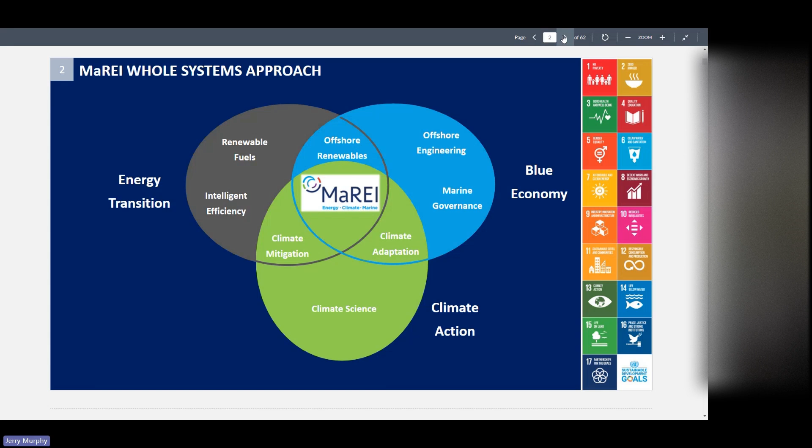So I'm the professor of civil engineering in UCC, and I'm the director of the MaREI Centre. And I work with these colleagues, so Archishman Bose, David Wall, Richard O'Shea, Davis Rusmanis, lots of brilliant young researchers have informed the content of this lecture. So we've lots of narratives and lots of stories, and I suppose my role here tonight is to knit it all together.

And this is the menu we work off. So we have this narrative that looks at renewable energy, that looks at anaerobic digestion, that looks at transport, that looks at agriculture, and we try to look at them all together in a system that utilizes energy and improves the environment. Last August, I spent a month locked away in a room working on this report for the International Energy Agency Technology Collaboration Program in Bioenergy. It looks at integration of anaerobic digestion with power to X.

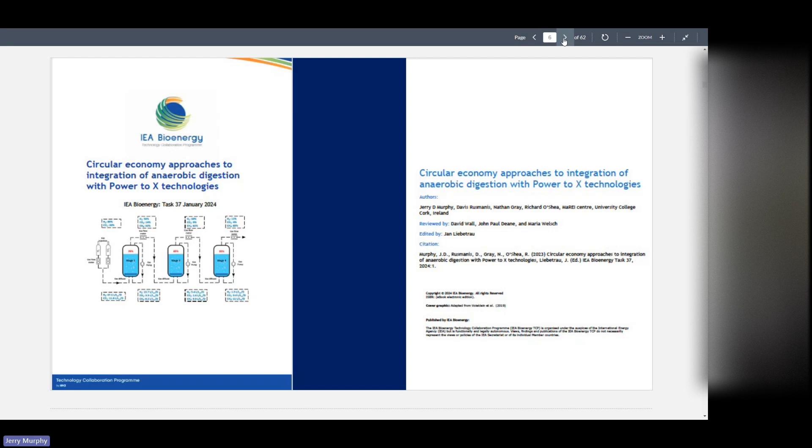So when we talk about power to X, we're talking about making things from electricity. And there's many things we can make, which I will talk about. So if I start on the top left and I look at renewable energy and electrolysers and look at it in an Irish context, the one thing we do find about energy and environment, every country is different.

It's bespoke. And Ireland is very challenged in that we're an island. So my electrical engineering colleagues often talk about islanded grids. We are one. We're not like Germany that's connected to France and connected to the Netherlands, or Denmark connected to Sweden and connected to Finland. We're very much an island. We have some interconnection, but it's quite sparse.

So in the National Ocean Test Facility in Ringaskiddy, we have 4 large swimming pools, and we can test devices that are at a scale of 1:20. So if we have a device that's 2 meters high, it could be 40 meters in the ocean. We can put down waves of 1 meter height, so they're 20 meters high.

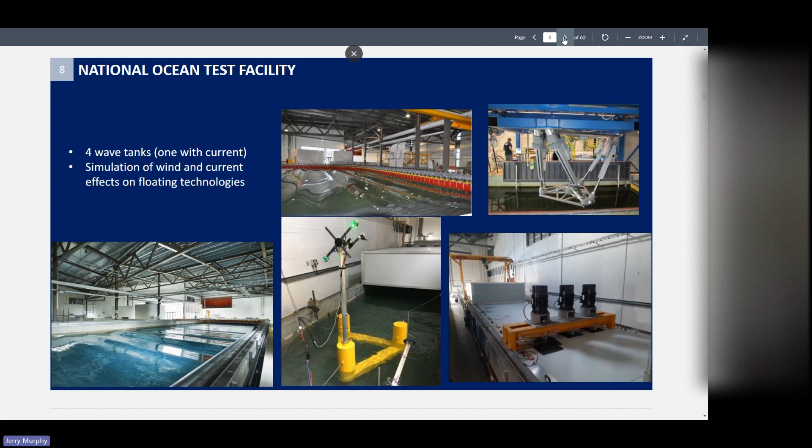And we coordinate a lot of the ocean test facilities across Europe. But it allows us to look at various technologies such as floating offshore wind, which is seen as a technology of the future in Ireland.

And this is what we're proposing to do in Ireland. We're already gone out to auction on the east coast for fixed bed offshore wind. We go to the east coast first because it's shallow water. Then we go down where we are here in Cork. The next phase will be down here, a mixture of fixed and floating.

And then we're going off into the open Atlantic. We're looking at going 65 kilometers offshore with floating offshore wind. Now, Ireland, because it's an island, has experienced the highest level of system non-synchronous penetration. And what that is, is the ratio of wind generation to the system demand. We've gone over 75%, and this is great credit to EirGrid, but this hasn't come easy.

For example, in Moneypoint, there's a flywheel that we spent 150 million euros to build to provide inertia, because if everything is coming from wind, it's not like the old turbines and the old power plants. So an awful lot of work has been done to allow us have lots of wind energy on the system.

And I suppose the challenge going forward is that we're only at 40% renewable electricity. What happens when it's 80 or 90% or 100%? It becomes very, very challenging. We have a target of 5 gigawatts of offshore wind by 2030, and that takes us to 80%. So we're doubling our percentage of renewable electricity by putting 5 gigawatts of turbines in the water.

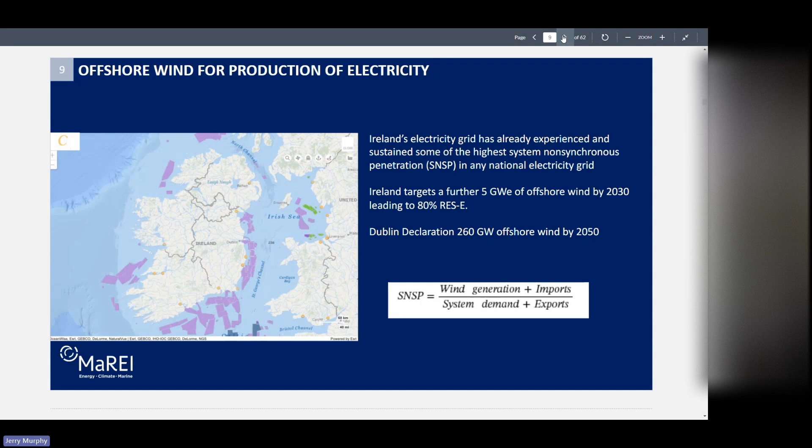And we talk about dispatch down. Again, this is very high in Ireland because we're an island. So all these wind turbines are blowing in the middle of the night in the summer, we're not using electricity. We spill, or we dispatch.

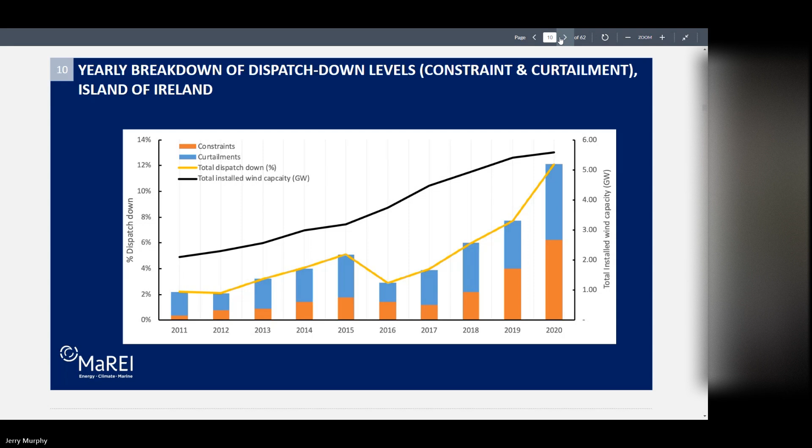This graph is from Davis Rusmanis in the audience. Ireland is at, in 2020, 6 gigawatts of onshore wind, and we are dispatching down about 12% over the year. That's either because there's a constraint on the electrical system, or it's produced at the wrong time.

So 12% of our electricity is very, very significant, and it's spilled. So there's an argument for hydrogen, and we will be producing lots of hydrogen. We make hydrogen by splitting the water molecule into hydrogen and oxygen.

Hydrogen will then be an energy vector. It's a gas, which is very important. We actually, in Europe and in America, use twice as much energy from the gas grid as the electricity grid. And gas is an ingredient, and that's important.

So when we talk about natural gas, it's CH4. When we talk about hydrogen, it's H2. And the H is important because we make fertilizer from ammonia, NH3. That comes from natural gas, and the N comes from nitrogen in the atmosphere in the Haber-Bosch process.

We make methanol for chemicals, and that's CH3OH. At the moment, we use natural gas. In the future, that will have to be a renewable molecule. So natural gas is an ingredient that we hope will be displaced by hydrogen, which will come from offshore wind.

So it's not just energy. There's chemicals, there's plastics, there's fertilizers, there's lots of things that use fossil fuel. And when we put fertilizer on the land, what we're really doing is putting natural gas on the land. So fertilizer comes from natural gas.

If we don't have natural gas, where does the fertilizer come from? And anyone from a farming background would be well aware that the cost of agriculture escalated massively during the ongoing war with Russia, because we didn't have natural gas coming across the border. We weren't making fertilizer to the same extent.

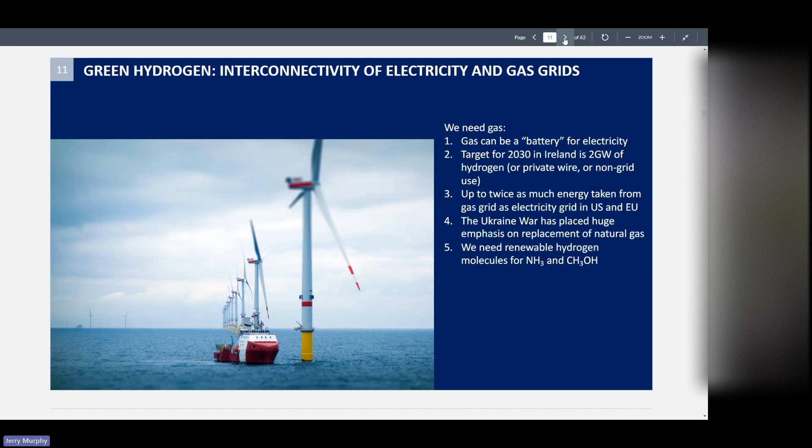When we talk about 15 megawatt offshore wind turbines, they're big. They're 345 meters tall. The Eiffel Tower is about 330. And we're going to put 7 gigawatts of offshore wind in the water. Originally, it was meant to be by 2030. That's 467 Eiffel Towers - Ireland is going to put 467 Eiffel Towers in the ocean.

Initially, it was meant to be by 2030. I'm a civil engineer, I'm thrilled because my graduates will be doing this. And we've been looking at ports, so we have to develop ports, which will be sort of almost like a radius of 500 meters.

The ship comes in, picks up a 300-meter tower, picks up a nacelle, picks up rotors, and then goes out into the ocean. And when we're looking at some of these devices will be floating, so it's going to be hydrodynamics, there's going to be cables, we're going to be tying them down to the bed of the ocean. So civil engineers are going to be in high demand working on these very, very difficult systems.

For example, in Foynes, in the west of Ireland, we're looking at wet storage. So there'll be huge frames sitting just inside the estuary, waiting for the 20 days when the waves aren't too high, and they'll all shoot out and try and erect these massive, massive structures.

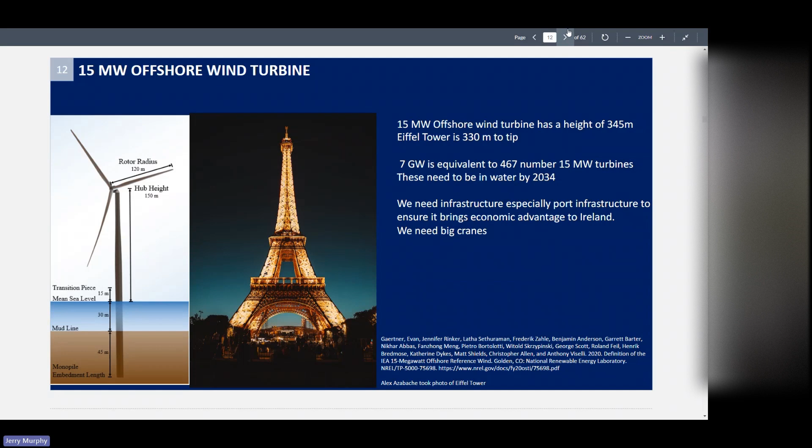This is the auction pipeline. And what's interesting here, we have an auction pipeline out to 2030, and it's 17 gigawatts. Ireland's electrical capacity hasn't gone beyond roughly 6 gigawatts. So we're putting in a capacity that's 3 times our present capacity demand.

And the idea is that we will do something with that power. A perspective we would have is we'll make hydrogen. And from the hydrogen, we can make ammonia, fertilizer, or methanol for green chemistry and formaldehyde. So Ireland will have lots and lots and lots of energy significantly in advance of the maximum demand for electricity.

Now, there will be periods of time where it gets very cold for 2 weeks and the wind isn't blowing, we will have problems. But typically, we'll have a lot more energy than is needed for electrification.

This is quite nice. This is the south coast, so we're all sitting here in Cork. And these two zones, this is Marine Area Plan. EirGrid is the designer of the system, and they're looking at having substations here.

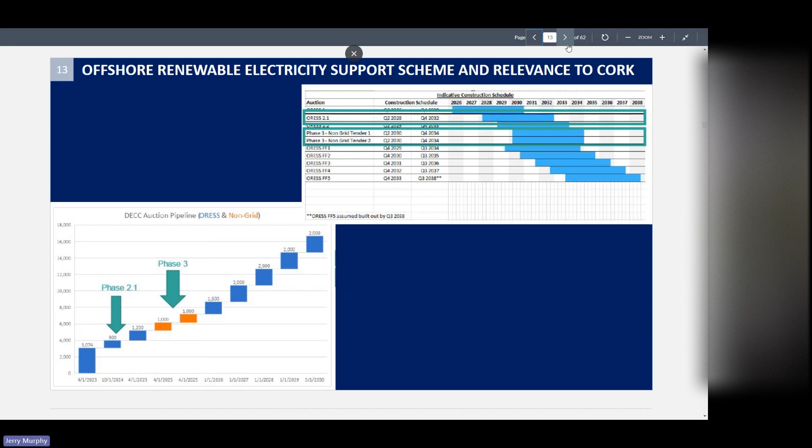But we're looking at a gigawatt coming ashore. And if I go back, so these little orange guys are non-grid. Initially, we were talking about hydrogen, but there are not enough electrolysers on planet Earth for Ireland to get two gigawatts of electrolyser by 2030. So we're looking at a gigawatt, potentially, of power coming into Cork.

And Cork City uses about 200, 250. So we're going to have a cable that does not go into the electrical infrastructure of Ireland that will have almost four times as much electricity as Cork needs. So that lends itself to, we can make hydrogen molecules and do things in Cork that will add value.

Now, you could also say we'll export it into Europe. And from my perspective as a civil engineer, you can make steel in Indonesia, assemble it in UAE, put it in the water off Ireland, and have a cable into Europe. And Europe continues to make cars and gas and hydrogen and ammonia, and we watch it. My preference is we bring it ashore and we do things with it and we make higher value, and we export things with higher value.

We had an ammonia production facility in the harbour in Cork. When we found natural gas, we made ammonia. Natural gas dried up, we stopped making ammonia, but the facility is still there. There's no reason we couldn't have green ammonia, where we use hydrogen from offshore wind instead of natural gas, but we make the same end product, ammonia.

And there is a proposal now for an ammonia combustion facility in the harbour. Mitsubishi have said that they're going to build an ammonia facility for combustion to make electricity. So when the wind isn't blowing for 20 days and it's really cold, we will have made ammonia, and that ammonia will make dispatchable electricity.

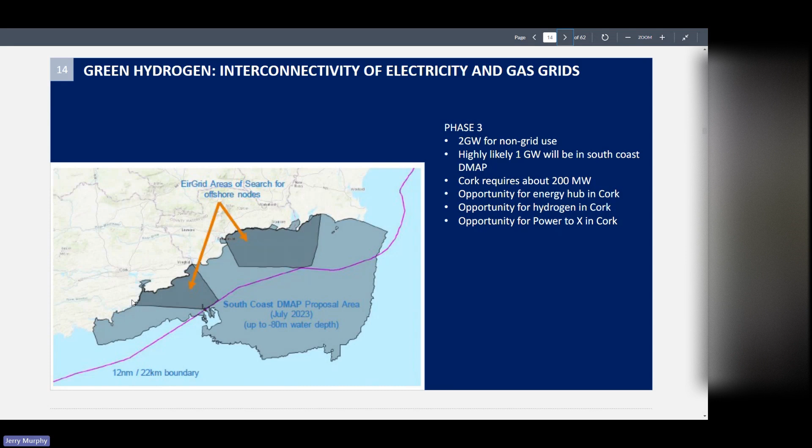We've looked at how this could work, and typically offshore wind farms will produce electricity when the demand is high. But in the middle of the night on a summer's day when nobody wants the electricity, the value will drop. The first auction in Ireland went out at about 8.5 cents a kilowatt hour for the electricity. So we're looking at bidding for electricity to make hydrogen at 4 cents a kilowatt hour in the day ahead market, and that would result in hydrogen at about 12 cents a kilowatt hour.

So it's important to realize that if you have electricity and you convert it to hydrogen, the price of the hydrogen is about three times the price of the electricity per kilowatt hour, because there are inefficiencies along the way and there's infrastructure required. So hydrogen is more expensive than electricity. And if you were to go back then and make electricity from that hydrogen — store the hydrogen and convert it back to electricity — you would be at about 22 cents a kilowatt hour. So you'd be almost five times more expensive than the electricity you came from. So the idea of hydrogen as a battery to make electricity later is very, very expensive.

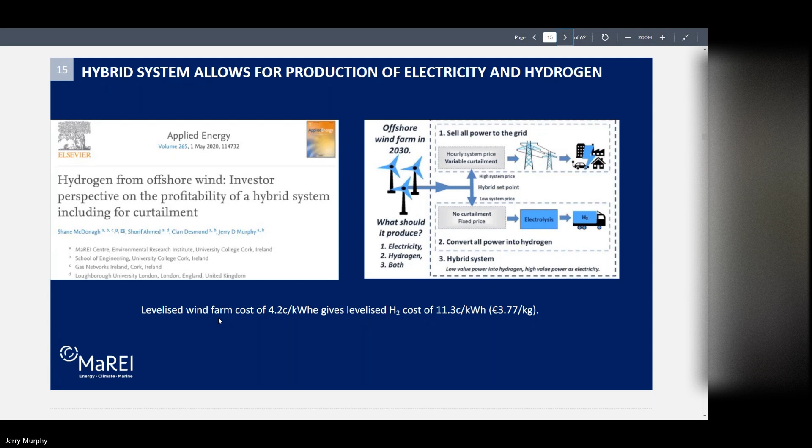We also looked at where we put these electrolysers. So you could have a HVDC cable coming ashore. For example, we have a HVDC cable coming from Brittany into Cork, which is under construction, it's going to cost about 2 billion. If we were to start that process now, we'd be waiting for 5 years because of supply chain issues, and it would be more expensive. So 2 billion to come from France to Ireland.

And we do see a lot of these wind farms in the future off the west coast being 65 kilometers from the shore. So there is a potential to put the electrolyser out on the wind turbine. So you now have your Eiffel Tower, you'd put it on a platform, you'd have a battery, you'd have a desalination unit, you'd have a brine discharge, and you'd have an electrolyser, and you can pipe the hydrogen ashore. So you can have a hydrogen pipe, which should not, we believe, take as long to order as a HVDC cable. You could also have, they like to have submersible, they like these spar turbines.

If you have a 1 gigawatt farm, you could have 100 wind turbines, and they could connect to a floating factory. And on that factory, you'd have your battery, your desalination unit, your electrolyser. And we're looking potentially that you could have the Haber-Bosch process out there. So you could have ships coming up to this floating platform and loading up with ammonia, and it doesn't come ashore to Ireland at all. So this is plausible. I suppose we don't know, but there are lots of concepts, but there'll be very big floating factories off Ireland making electricity or hydrogen, or maybe making ammonia.

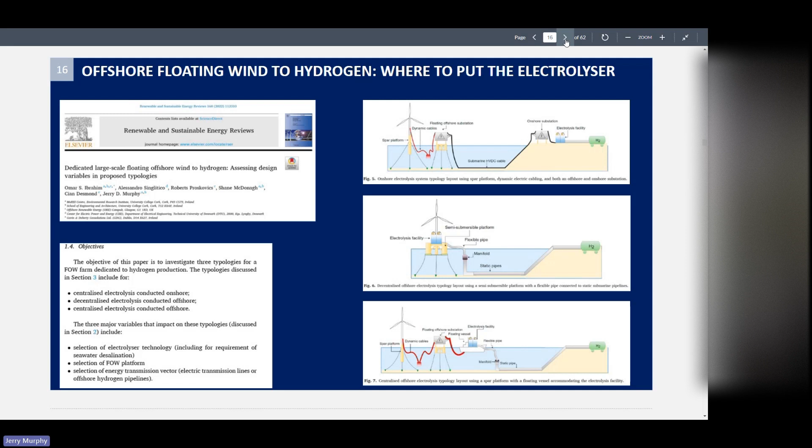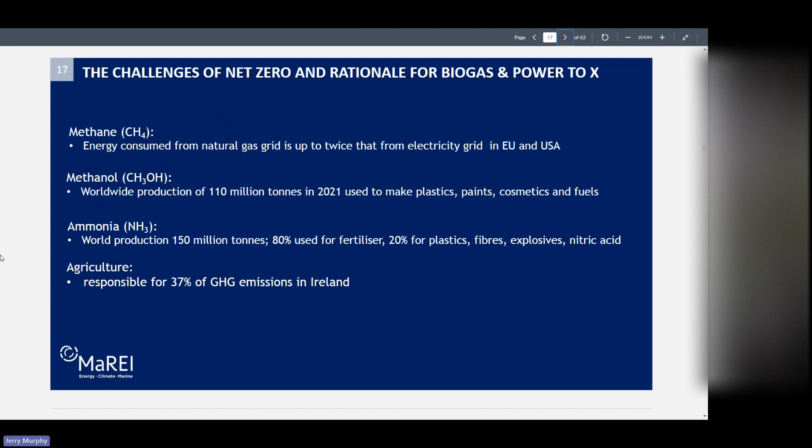Challenges for net zero: methane. We probably need methane because we use an awful lot of methane at the moment. We're going to need methanol. We produce 110 million tons per year, and methanol is a precursor to formaldehyde, which brings us to green chemistry — so we could have a green biopharmaceutical industry in Cork by making methanol. Ammonia, we mentioned this, it's a fertilizer, the most produced chemical on the planet. Again, the H2 can come from offshore wind. And then agriculture, responsible for 37% of our emissions in Ireland, predominantly from belching cattle but also from storage of slurry. So I want to move a little and look at anaerobic digestion and go into agriculture.

Anaerobic digestion is a microbial process. It employs some bugs and archaea. We start off with complex polymers. There's a hydrolytic process, then a fermentation process — you make volatile fatty acids such as acetic acid and butyric acid, and you can convert those acids to methane, water, and carbon dioxide.

There are lots of these across Germany and Sweden. They're very much a waste treatment process. I have colleagues who don't like the idea of anaerobic digestion because it's bio and everything should be electrified, but we have waste products — we have slurries, we have food waste. My understanding is our food waste goes on a boat and leaves our island. So we could treat our food waste.

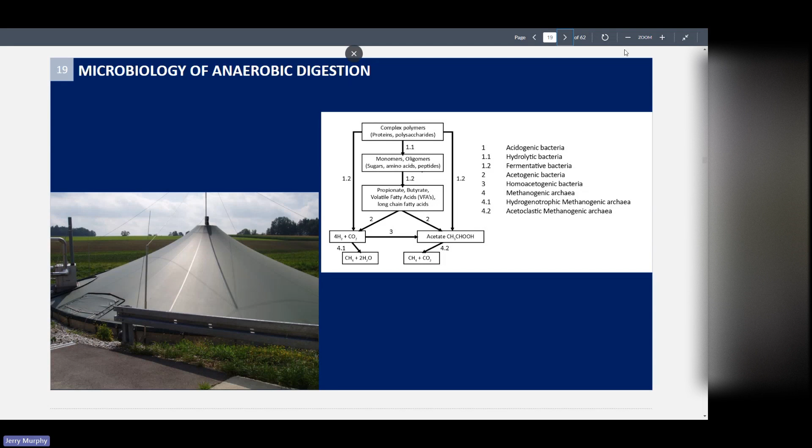We've done an analysis that if you treated the food waste from Cork in a digester, you'd run the bus service. If you treated the food waste in Dublin, you'd run the bus service. So we can have a circular economy proximity principle, converting wet organic material into an energy vector.

I led the IEA task on biogas for 6 years. We produced lots of reports, all available online — I've given 6 years of my life to this process. Lovely reports, lovely case stories, all available for free if you click on those links.

But what's happening now, which I find quite interesting — RePowerEU is Europe's way of looking at decarbonising, and they want a tenfold increase in biomethane by 2030. The Climate Action Plan for Ireland wants us to have 5.7 terawatt hours of biomethane, which is 220 3 megawatt facilities. So we're going to be building really large anaerobic digesters to allow us to meet our renewable targets and to decarbonise.

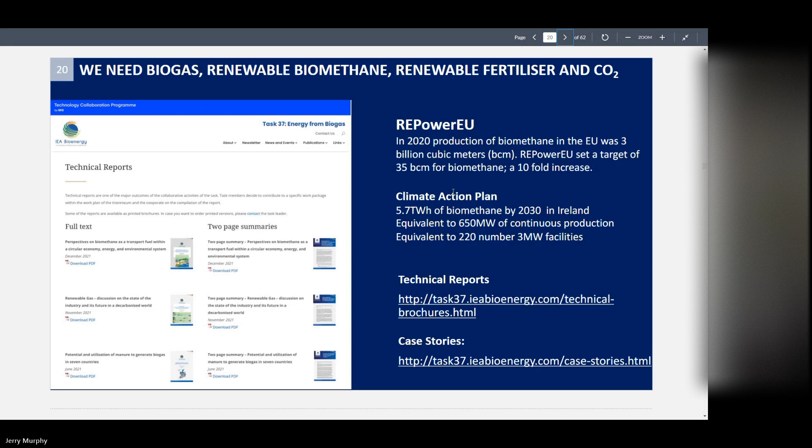There's no fertilizer. But what they did is put their dung into a digester to mineralize it, turning it into liquid with a nutrient value. So the only fertilizer on this farm is digestate from a biogas plant — the biogas is almost secondary. They needed an organic fertilizer, so they created one, and they're certified at minus 0.82 kilograms CO2 per litre of milk. So it's an organic farm producing organic milk — no fertilizers, no weed killers, no natural gas spread on the land as ammonia.

And this is the target for Europe and for Ireland that really can only be met by having small anaerobic digesters at these farms.

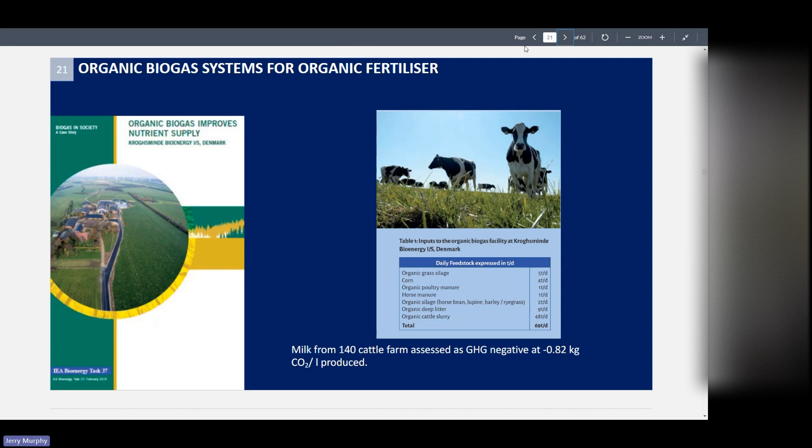This is the opposite case. Denmark got together around 2010 — farmers had a co-op convention — and there was a lot of eutrophication, lots of pollution of watercourses. A decision was made that by 2030, slurry won't go onto the land raw; it will be treated in advance. By 2020, over 50% of slurries were digested. My understanding is there were grant aids for 6-month storage. So it was driven by water quality.

We're aware that Lough Neagh in Ireland is highly polluted with a crust of microalgae from excessive nutrients, and Ireland has the 3rd highest level of bovinity on the planet — that's the ratio of cattle to people. We've lots of cattle and lots of slurry, and lots of our wells are contaminated. This is a solution: you have 6-month storage of slurries and you co-op together.

What happens here is there's 725,000 tons of wet organic material in a digester at the center of this circle. Farmers go to a sump, drop in their slurry, it's augered up to 20 kilometers to the digester, biofertilizer is augered back — which has a high fertilizer value and saves on buying fossil fertilizer — and they put the gas into the gas grid.

And this is a model — very, very large digesters. You could have an anchor tenant, which could be food waste in Cork or stillage from a distillery. Denmark is now at 39% of its natural gas coming from biomethane from these systems, but it was driven by water quality.

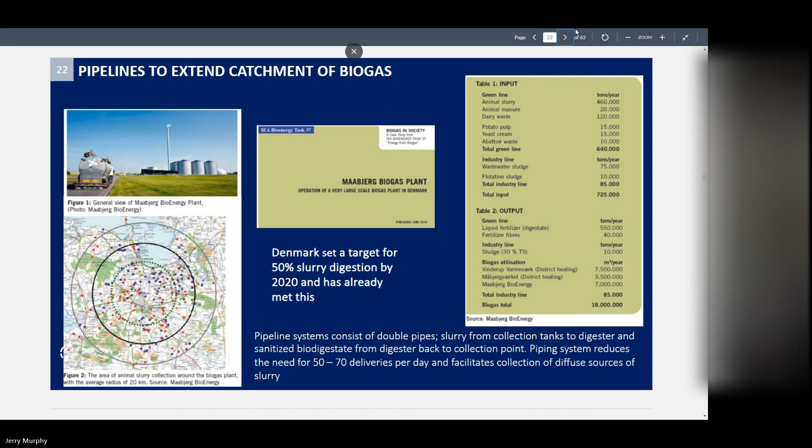Another thing that's quite interesting is CO2. CO2 is a product. Denmark uses 65,000 tons of CO2 per annum, and it goes into your bubbly water, into your beer. It's used - you can't slaughter animals without CO2. You introduce animals to an environment with lots of CO2, they become dozy, and you can then slaughter them. This was an issue during Brexit.

A fertilizer plant closed down. We get our CO2 at the moment from the production of fertilizer. So we use natural gas, CH4, the H goes to ammonia, NH3, and the CO2 is given off. That CO2 is collected - so fossil CO2 is used as the CO2 product in most countries. So when Brexit happened, a fertilizer plant shut down, there wasn't CO2, they couldn't slaughter pigs. Pigs got too old to be slaughtered, and there was mayhem. My understanding is there was money paid to the fertilizer plant to reopen.

But this plant in Denmark produces on its own 25,000 tons of CO2. The methane goes into the gas grid, the CO2 is left behind. There's a 7-step process to make it food grade. CO2 is used in soft drinks, in dry ice, in cooling eggs, in laser cutting, in laboratories. It's a product - we need CO2. So we can get that CO2 from a biogas plant.

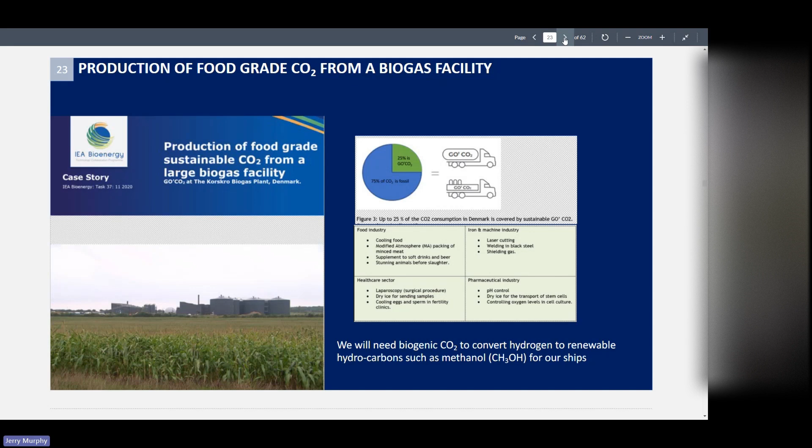So the joining together of offshore wind and hydrogen with anaerobic digestion is done in the next process, which I'll go through. This is a plant we visited in Germany - it's Werlte, in the north of Germany. Lots of offshore wind, lots of curtailment of electricity. So what they did is they built a 6-megawatt electrolyser next to an existing anaerobic digester.

It's a food waste digester, and the methane goes into the gas grid and the CO2 is left behind. So they made this electrolyser - electricity that would have been curtailed is spilled to the electrolyser. And we have the Sabatier equation, which is 4 moles of hydrogen from the offshore wind, 1 mole of CO2 from the biogas plant, gives you a mole of methane and water.

So here they have biomethane going into the gas grid, but they also have what they call e-methane. That methane comes from the hydrogen from offshore wind that would have been spilled and the CO2 that was a byproduct of the biomethane facility.

And they ran 1,000 Audi natural gas cars. So the business model was you buy your car, you pay a certain amount a month, and you have a little credit card that is your fuel, and that fuel is e-gas.

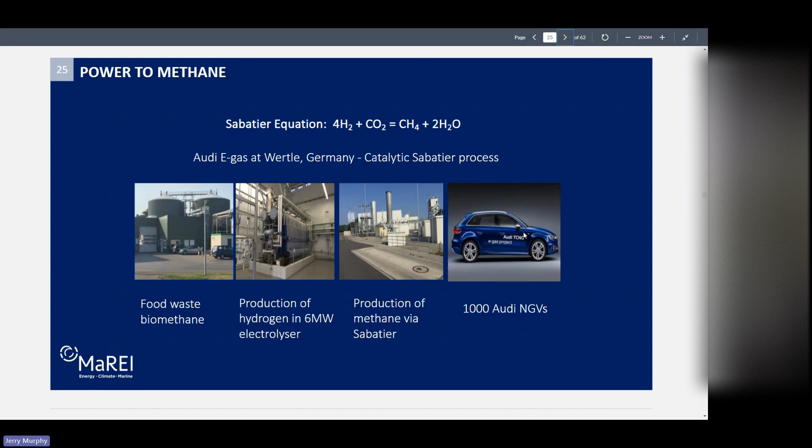So we found that very interesting, and we're biological engineers. So we came back, and this is the work we do. We do a lot of work here, but this guy is a hydrogenotrophic methanogenic archaea. What he does is the archaea eats hydrogen and CO2 and produces methane. It's exactly the same as the Sabatier equation.

The Sabatier process operates at 400 degrees Celsius - it's a chemical process. This is a biological process, and it's very favorable. When you look at the stoichiometry, it's a negative Gibbs free energy, which means it's favorable.

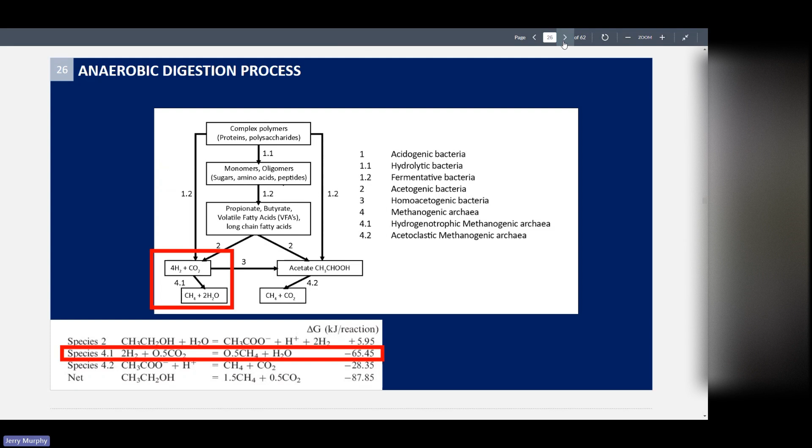So we went into our lab and we started adding hydrogen and carbon dioxide to our anaerobic broth. And we found that all of a sudden this became dominated by hydrogenotrophic methanogenic archaea by the name of Methanothermobacter wolfeii. Wolfeii is the Latin for tungsten - so giving them a little bit of tungsten, they worked a little bit better. We found a little archaea that ate hydrogen and CO2 and gave us over 90% methane.

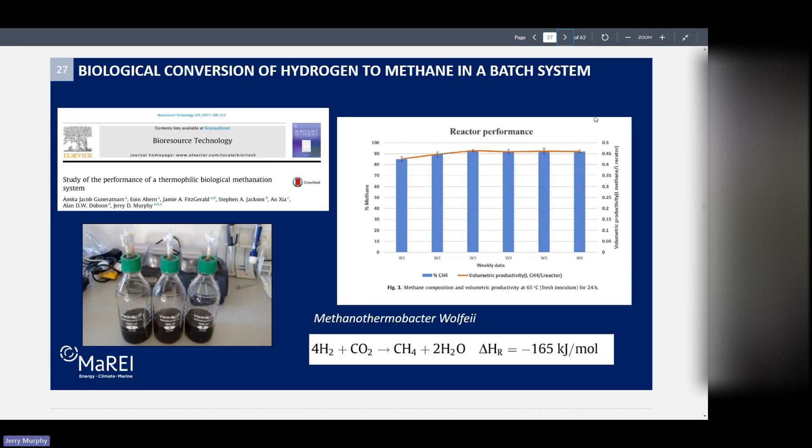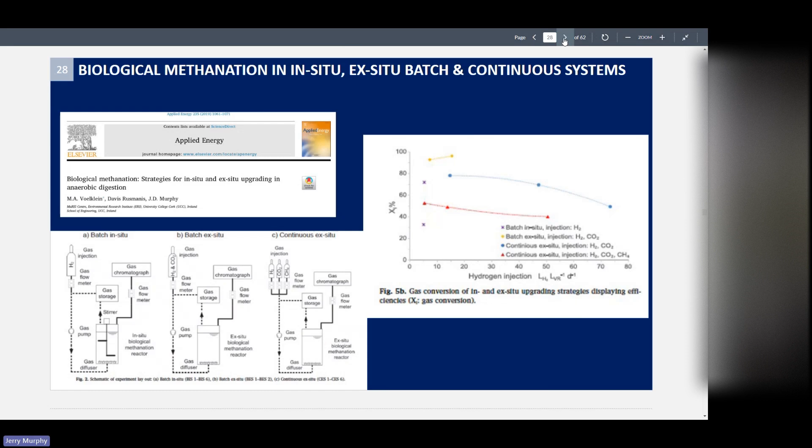So we then decided, well, we have to go further. And we did lots of science - this is Davis Rusmanis's PhD. We looked at feeding hydrogen into an anaerobic reactor, hydrogen and CO2. Hydrogen doesn't go into solution very readily - we needed it under pressure, we needed microbubbles. We played with lots of systems. So there's 3 years of work here by Davis Rusmanis, and we ended up with this type of a system.

So we decided what would work quite well is add hydrogen and carbon dioxide under pressure, circulate the gas a few times, do some of the job, go on to the second reactor, do a bit more, go on to the third reactor, and we have quite a good system.

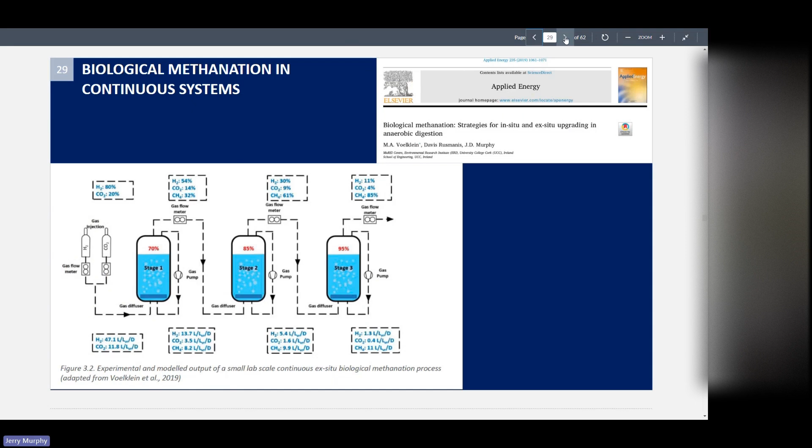So we have a nice technology, and we call that TRL level 6. So it needs a lot of work. You need to go into the field and do it.

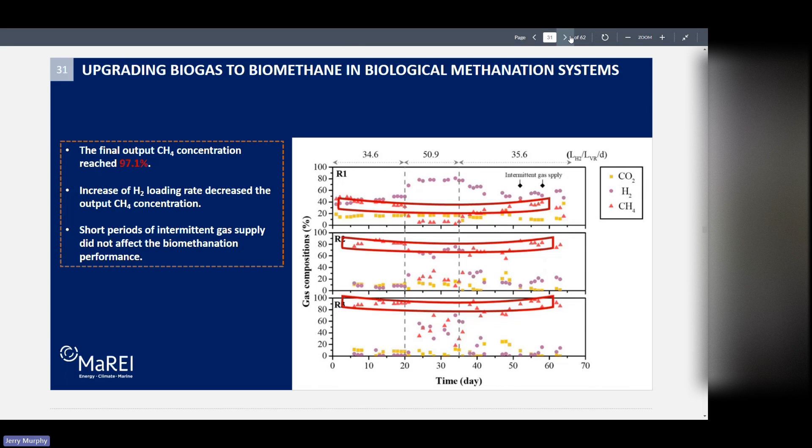So we were looking at how this would work, and we have colleagues in Germany who were also playing with this technology. Here is a little ex situ biomethanation plant and an electrolyzer. This is a demonstration plant, sort of research. Electrolysis is water being split into hydrogen and oxygen.

Hydrogen has a heating value of 3 kilowatt hours per meter cubed. They put in a 300 kilowatt electrolyzer. At 60% efficiency, there's 180 kilowatt hours of hydrogen per hour. Hydrogen is 3 kilowatt hours a meter cubed, so they're making 60 meters cubed of hydrogen per hour.

We need 4 times less that amount of CO2, so the biogas plant provides 14 meters cubed of CO2. 4H2 plus CO2 gives CH4. So the biogas, which was 16 meters cubed of methane and 14 meters cubed of carbon dioxide, is now 30 meters cubed of methane. We've converted all the CO2 to methane, upgraded the biogas to pure methane, and increased the energy output by 67%.

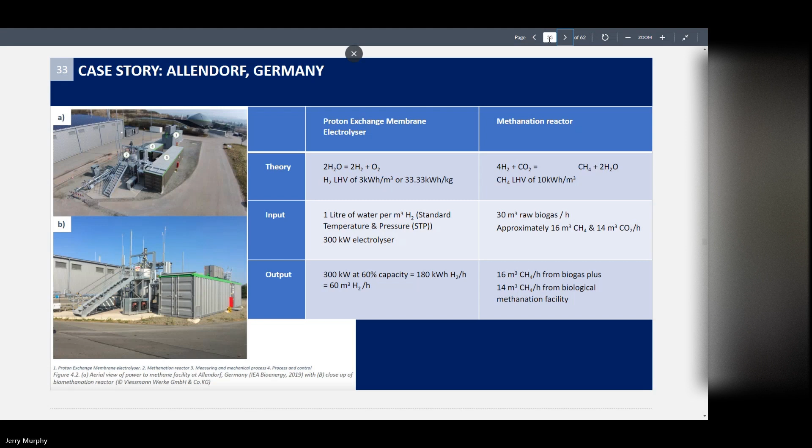There's another plant in Copenhagen, Biocat. It's a bit bigger - you have a 1 megawatt electrolyzer giving us 600 kilowatt hours of hydrogen. That's 200 meters cubed of hydrogen, which will react with the 50 meters cubed of CO2 to make methane. So our hydrogen converts CO2 to pure methane - the biogas becomes pure methane, and we've increased the yield by 67%.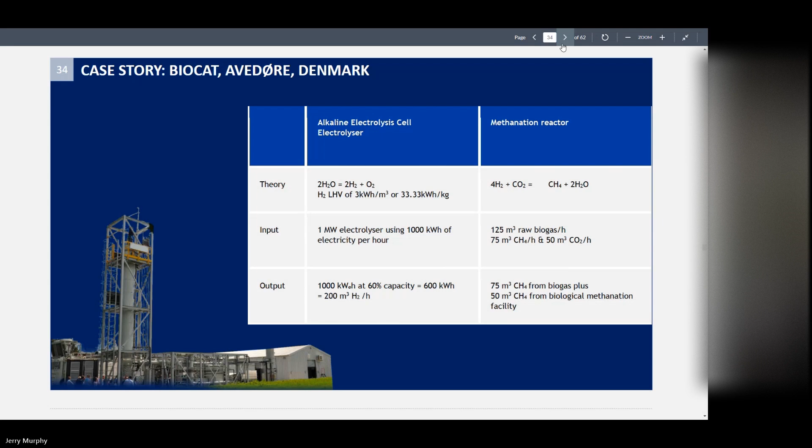So that's early technology. We're trying to look at power to X. When X equals 1, it's hydrogen. When X equals 2, it's methane. When X equals 3, it's methanol, so we go to a liquid fuel. There are all these X's. We've looked at hydrogen with an electrolyzer, and we've looked at methane with ex situ biomethanation. So we're trying to see where would we do this, and why would you do it.

This is a piece of work we did with Davis. The idea behind this was that we love to object to planning in Ireland - it's a pastime, we'll object to things. A digester was proposed in my community, and my neighbours were saying we'll wake up dead in our beds in the morning because we'll have asphyxiated. So we love to object.

So we looked at this in terms of, if you did an electrolyser in Cork, where would you put it? I designed Cork main drainage sewerage scheme in 1992, and I've never been there. People don't go to wastewater treatment plants. So instead, we'll stick the electrolyser in Cork main drainage down in Carrigrennan.

And we sized it based on the wastewater treatment plant. Typically you pump air into a wastewater treatment plant, and air is about 20% oxygen. So if you pump pure oxygen instead, you reduce the pumping by a factor of 5. We worked out the oxygen demand, and figured out what size of electrolyzer we'd require to supply that oxygen - it was a 10 megawatt electrolyzer.

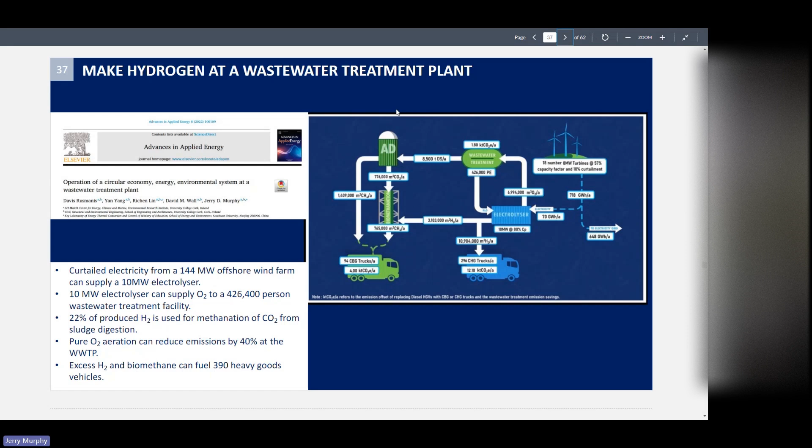We could put that methane directly into the gas grid. We could do lots of things, but we decided to look at the transport case. The other thing we were looking at is there's lots of anaerobic digesters in Germany and Denmark, and we're going to have more electricity than we need, so we can make hydrogen at those biogas plants.

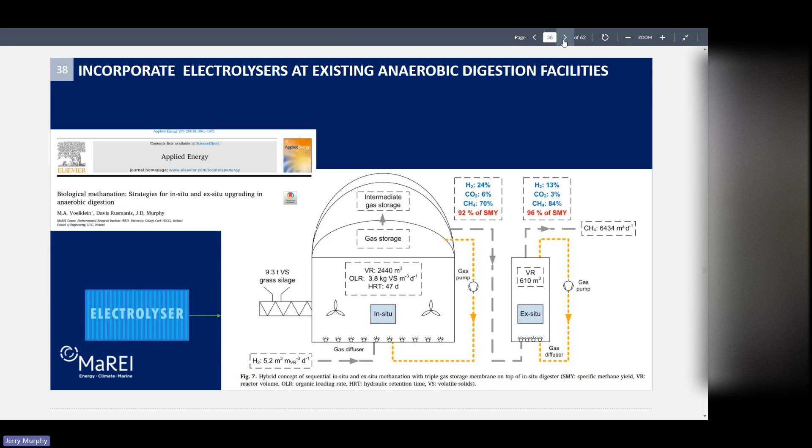So what we looked at, this is Denmark. They had lots of anaerobic digestion, big digesters dealing with slaughter waste. One thing I'd like to say is they don't use crops. Denmark does not have crops, because one of the criticisms of anaerobic digestion is that we'll use food to make gas. So Denmark decided that there's no crops. This is for food waste, for pig slurry, for slaughter waste.

At the moment, the level of biogas production is a 39% substitution of natural gas. But by putting an electrolyzer and an ex situ biomethanation at one of these digesters, you increase the output of methane by 67%, because all that CO2, which is about 40% of the biogas, becomes methane.

Ole Hvelplund is the CEO of Nature Energy. They've been bought out by Shell, but they're now building the world's largest ex situ biomethanation system. The plan is, if they do that at every digester, without using any more feedstock, you're at 65% green gas. So that's a plan. And they will have 100% green gas by 2035. So all the gas in the grid will be green. Some of it will be biogenic from slaughter waste and distilleries. Some of it will be e-methane.

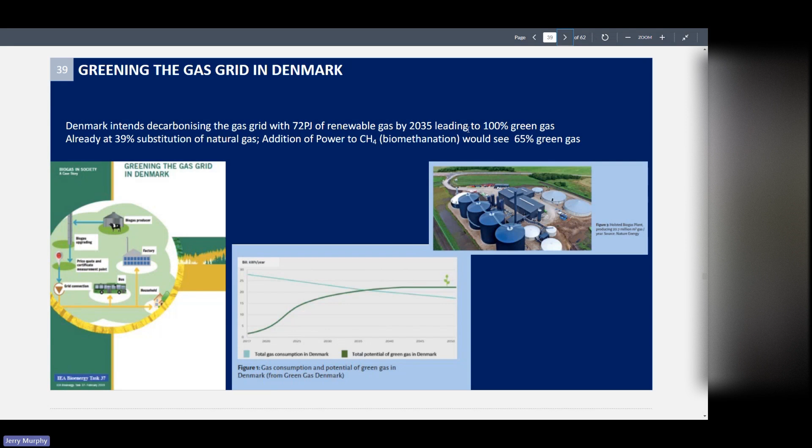Hydrogen is very, very voluminous. It's quite explosive. So converting it to methane condenses it, and you can use existing infrastructure. So the gas grid that's there can use methane to transport it. It can't use hydrogen.

We then looked at other technologies which are quite nice. So this is a typical anaerobic digester. This is power to gas, where we add hydrogen, but we also looked at just putting the electrodes directly into the anaerobic digester, because an electrolyzer is at best 70% efficiency. So we stuck electrodes into our digester. What happens is electrons go to the cathode. The electrons react with CO2, and they convert the CO2 to methane. So if you like, this is power to gas in one chamber with no electrolyzer.

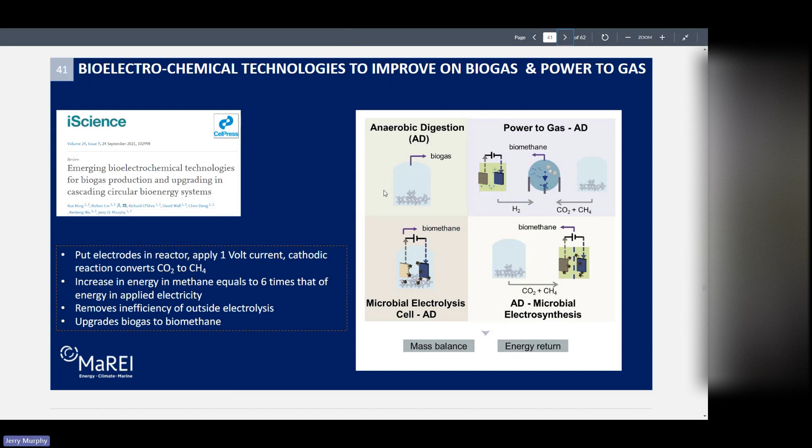We put in a voltage of 1 volt, and we found that we were getting 6 times return of methane compared to the electricity we put into the digester. So it's at a very low TRL, but this is a way of almost halving the feedstock to get the same amount of methane output. So we call that a bioelectric scheme.

One thing we're doing, which I'm really fond of, this is for small scale systems. So we're introducing algae. We've been working on this for a while, and it's the PhD of Archishman Bose, who's now a full-time lecturer in process engineering here in UCC, funded by Eli Lilly. The work we did was, is there a way of upgrading small-scale biogas?

So we're looking at Dingle, and we've done this work with Dingle Hub. We've been going down there since probably 2016. They had a problem set, and I love this. The problem set they had in Dingle was they would like to have a slow food movement. They'd like to say this is Dingle beef, grown in Dingle Peninsula, and it's salty because it's on a peninsula, and you'll pay €2 extra because it's Dingle beef. The problem is they don't have an abattoir, and the prices they were quoted for dealing with byproducts was very, very high. So if we build a digester in Dingle, they can have an abattoir, and the byproducts in the abattoir go into the digester.

They also spend $2 million a year on food waste going from Dingle restaurants to Waterford to be composted. So they save $2 million by having a digester because the food waste goes into that digester. They spend $1 million a year on diesel in Dingle for tractors, and they want us to make methane for their tractors. So what we're looking at is that the biogas goes up through a carbonate bicarbonate tower.

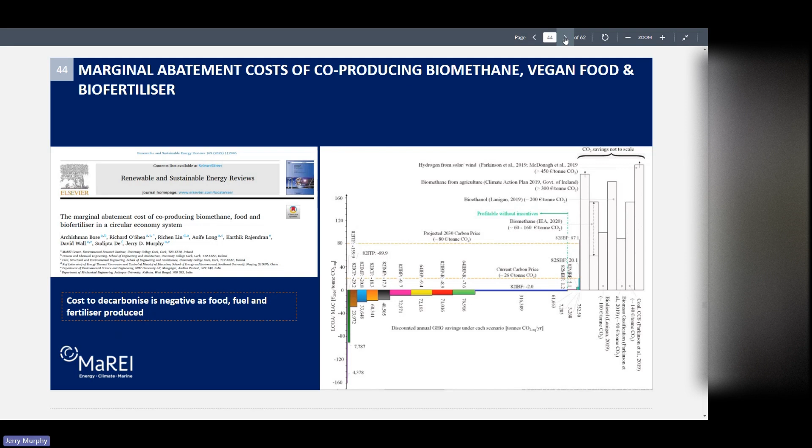I just want to jump on a little bit. When we're looking at the hard to decarbonize sectors, we're looking at shipping, we're looking at aviation. So if Ireland wants to be net zero and we leave this island, we're going to get on a plane that will burn a fuel, or we'll get on a ship that burns a fuel.

So I suppose the thesis here is batteries are great for cars, not for ships, not for planes, and we're going to need green chemistry to make green liquid fuels that are dense.

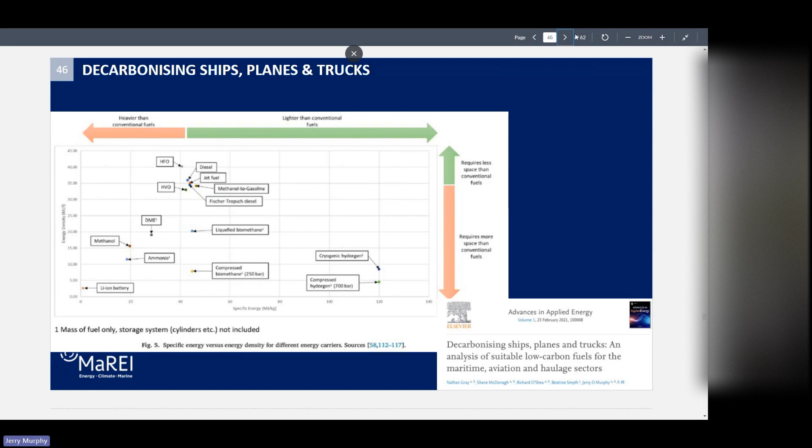We looked at the electricity for a truck. And we found that for less than 450 kilometers, you can put a battery in a truck. Beyond 450 kilometers, the truck is bringing the battery around the countryside, and you can't put anything else in there. So we reckon a hydrogen fuel cell. The problem with a hydrogen fuel cell, it takes about 3 times the electricity to make the hydrogen, to compress, to put in the truck than a battery. So a battery is great in terms of efficiency from electricity to propulsion, but it's too big, takes up too much space, it's too heavy.

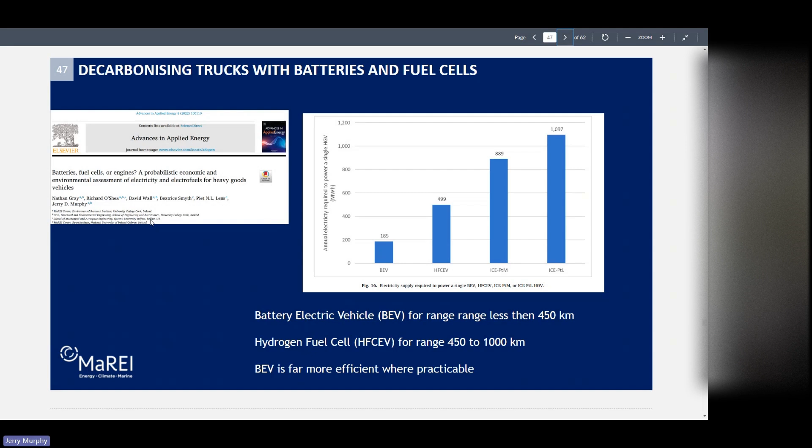They then moved into trucks, so they now have liquefied biomethane. You drop the temperature to about minus 200 degrees Celsius, and your methane turns into liquid. These trucks are traveling 1,000 kilometers on one fill. So we can use waste products — food waste, pig slurries, distillery waste — to run trucks 1,000 kilometers in a circular economy system.

One thing we're also looking at is that digester in Linköping. If we put an electrolyser at it, we can improve the fuel production by 67%. So rather than methane going in the truck liquefied and CO2 going to the atmosphere, we capture the CO2, react it with hydrogen from offshore wind, make more methane, and the truck goes further.

And a battery is not suitable — these trucks will never run on a battery. It'll either be a hydrogen fuel cell or some form of renewable diesel.

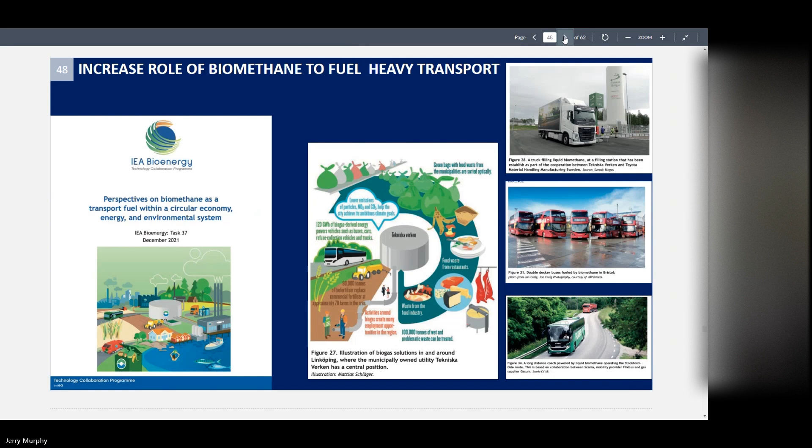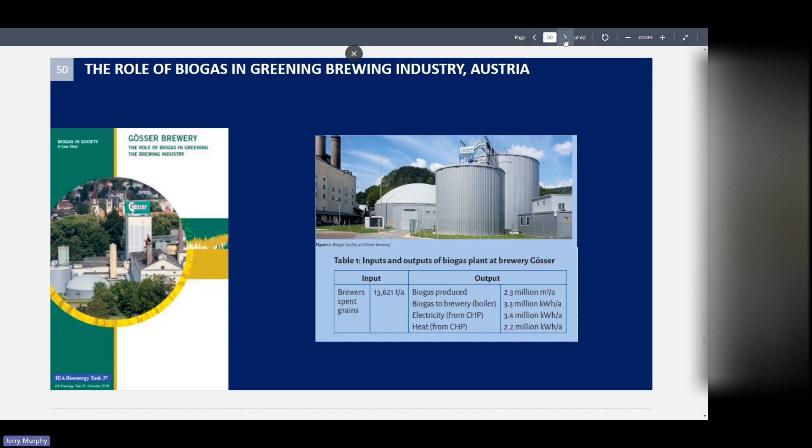We did a lot of work in distilleries, and this shows the circular effect. We looked at a distillery in Austria, the Gösser Brewery, and this brought us to Midleton, Irish Distillers Limited, Pernod Ricard. We've had a number of projects with Pernod Ricard within the MaREI Centre, and the energy manager is one of our graduates, James Brown.

So we looked at 21 decarbonisation pathways for the distillery, looking at electrification, organic Rankine cycle. Now, Midleton is relatively suburban, rural. The electrical infrastructure isn't there, but it could be brought down there. Whatever we did, we couldn't get beyond 67% greenhouse gas saving. If we electrified everything, there's still going to be emissions. You've got grain growing in the field, fertilizer on the grain, tractors coming from the field into the factory.

So we looked at a number of processes. We did a multi-criteria decision analysis to see what they wanted, but they're now spending 50 million on a digester in Midleton, and the biogas will take away natural gas that's used to evaporate stillage of alcohol.

And this is where it's interesting. Scope 1 emission is natural gas burned in the distillery. Natural gas in the old days was about 3 cents a kilowatt hour. We could also use the biomethane in the trucks that go out to the fields, and that would get us 15 cents a kilowatt hour in replacement of diesel, but that's scope 3. So we got more money from scope 3, less money from scope 1, but scope 1 is more important than scope 3. We also found that the fertilizer from the digester would replace the fossil fertilizer on the land that grew the grain.

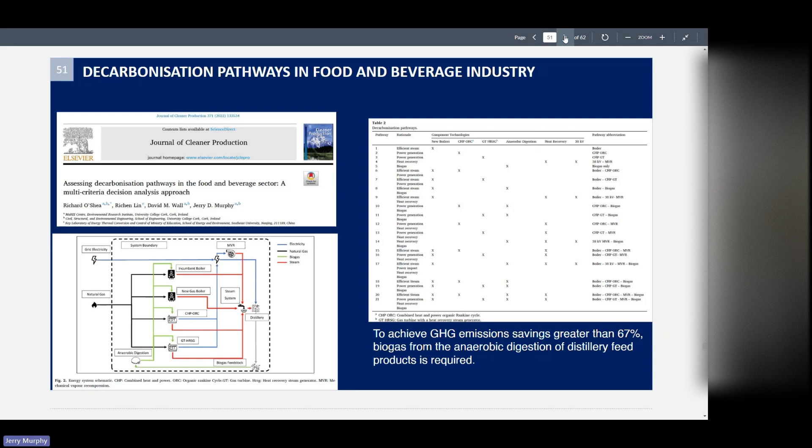Methanol - we have a project on methanol, and methanol is interesting for a number of reasons. One, formaldehyde comes from methanol, and green chemistry comes from green formaldehyde. Shipping is going to run on methanol. It's a done deal - new ships which will run on decarbonised fuel will run on methanol.

Maersk have 17 methanol ships, and they wanted green methanol, and they found it hard to find. They eventually went to Denmark, and they're steam methane reforming biomethane.

So the biomethane in Denmark, which is CH4, if you add an oxygen molecule, your CH4 becomes methanol, which is sometimes called wood alcohol. It's the smallest of the alcohols. So it's very easy to convert methane to methanol. So they're going to steam methane reform biomethane for shipping fuel.

So we were looking at potentially in Cork, we're going to have this gigawatt of offshore wind coming ashore. We convert it to hydrogen and we capture biogenic CO2.

And the joy of the distillery is that Irish Distillers have 55,000 tons of CO2 from the fermentation process. They're building a 16 megawatt digester - they're actually increasing the distillery. So we reckon there'll be 120,000 tons of biogenic CO2.

So this CO2 cannot come from coal. It cannot come from natural gas. It has to be biogenic CO2. So we reckon, in particular for Irish Distillers, 120,000 tons of CO2 will react with the hydrogen from offshore wind, and you'll make methanol. That methanol can be a shipping fuel or can be the source of green chemistry.

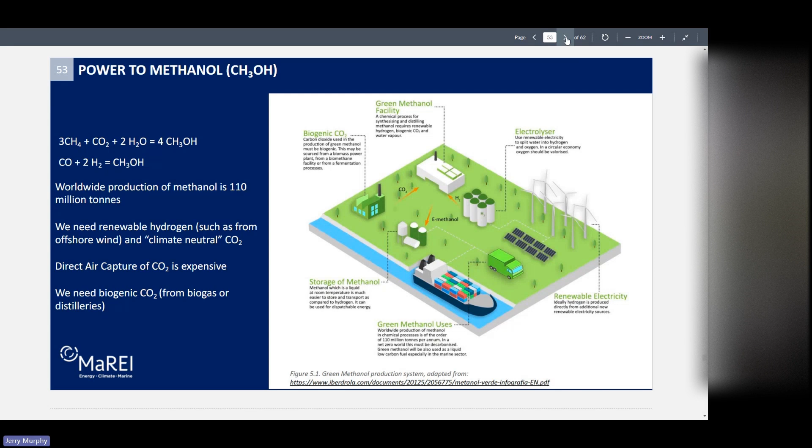I have a colleague in Italy who did a very interesting study. They make methanol in Italy, they make ammonia in Italy. His idea was they would build 100 biomethane plants and sell the biomethane virtually to the existing fossil fuel plants. In essence, the fertilizer plant keeps going, but they're paying the biomethane plant for their renewable green biomethane molecules, and there's a guarantee of origin.

And that is a process. But our preference is that it's proximity - that this is an electrolyzer taking hydrogen, and it's a new green facility, because otherwise they would be accused of greenwashing. If an existing fertilizer plant said we're now green because we bought molecules, people would say you're greenwashing, even though there's a process where these biomethane plants work.

One thing that's interesting is the IRA, the Inflation Reduction Act in America - with hydrogen they're saying there's 3 pillars. If you make hydrogen, it has to come from new facilities, called additionality, so you have to build a brand new wind farm to make your hydrogen, it can't be an existing one. They also have regionality, so it can't be a wind farm in Canada, it has to be a wind farm in America on your grid. So we've got additionality, regionality, and also by the hour - you have to figure out what's produced by the hour, and that's the hydrogen you can make.

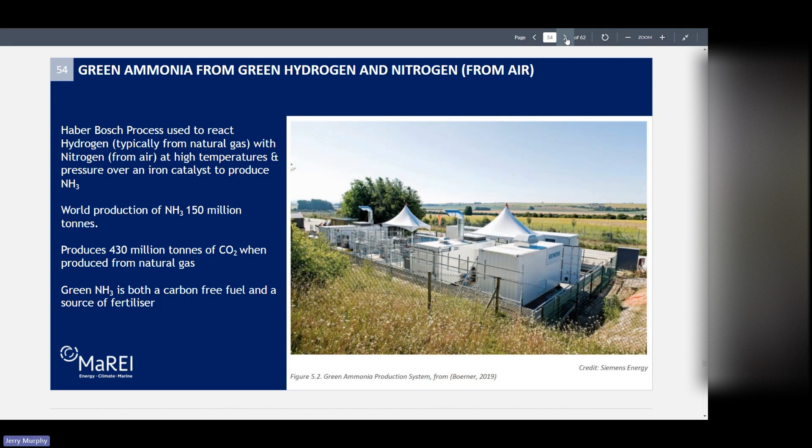I would say, again, for this type of system, we could employ those 3 pillars. It's a brand new wind turbine, it's producing hydrogen, we're budgeting by the hour, and that's the fertilizer that we produce.

Green steel - steel is a horrible process. We had Irish Steel, I actually worked in Irish Steel when they were bought by an Indian consortium, and we worked out all the liabilities and all the costs. I think Irish Steel sold to ISPAT for a cent, and I'm one of the reasons it was a cent, because I looked at all the liabilities in Irish Steel.

But we could now make this with hydrogen. So we could use offshore wind to make hydrogen, to make steel, to go back out and be offshore wind. At the moment, all the steel we're putting out there is coming from coke, which is a horrible process. So again, decarbonisation is more than electricity, it's more than energy, it's more than fertilizer - it's steel, it's everything we do.

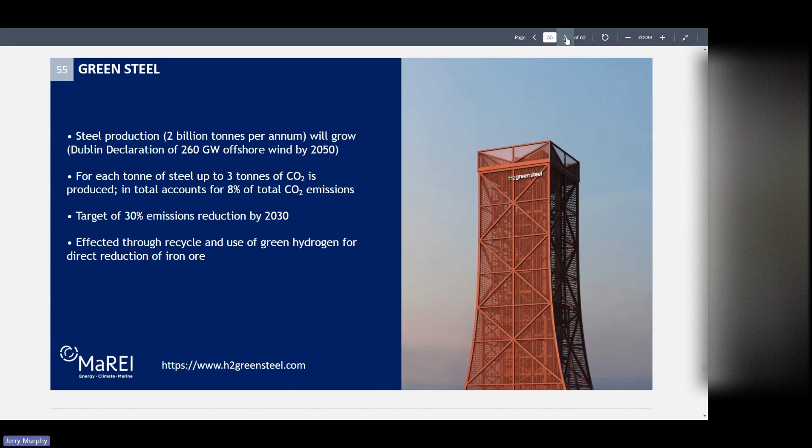Power to food - this is the new one, which I find fascinating. I mentioned microalgae as a sort of superfood. One thing I find interesting in terms of ethics is that some people don't like biogas because it's part of agriculture and therefore part of the meat industry. So we could make microalgae from a biogas plant that's been fed slurry, and the microalgae is vegan, but maybe it's not vegan because it came from a cow.

But then if it came from whiskey byproducts, would it then be a vegan product? So there's lots of ethical questions in what are we doing and why are we doing it.

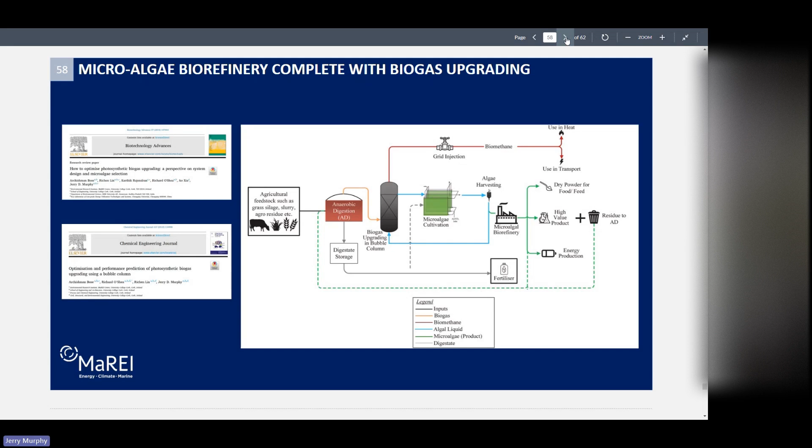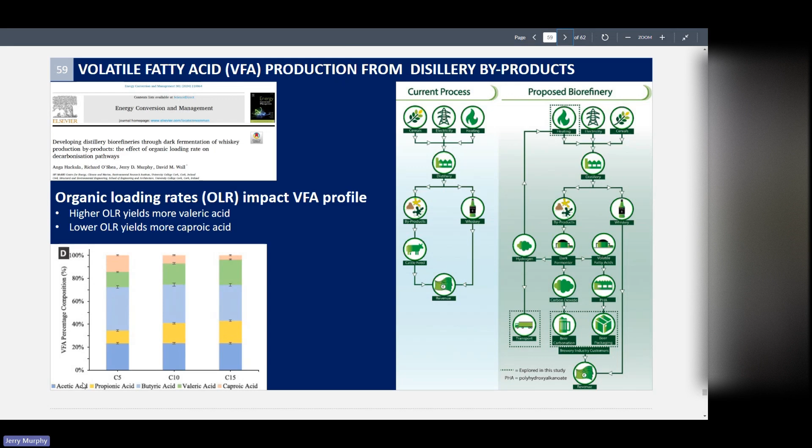So we can make chemicals from byproducts of a distillery. But what that then does - and this is SusFerm, led by John Morrisey, but it's very interesting - so offshore wind, hydrogen, fermentation of byproducts, you end up with acetate, and acetate will be a source of future food.

So we will make proteins from offshore wind and biogenic CO2, and this is, if you like, in competition with cattle. Now, my understanding is Italy has already banned this - Italy has said you're not touching our food. But this is going to happen, so we will make proteins from energy and biogenic CO2.

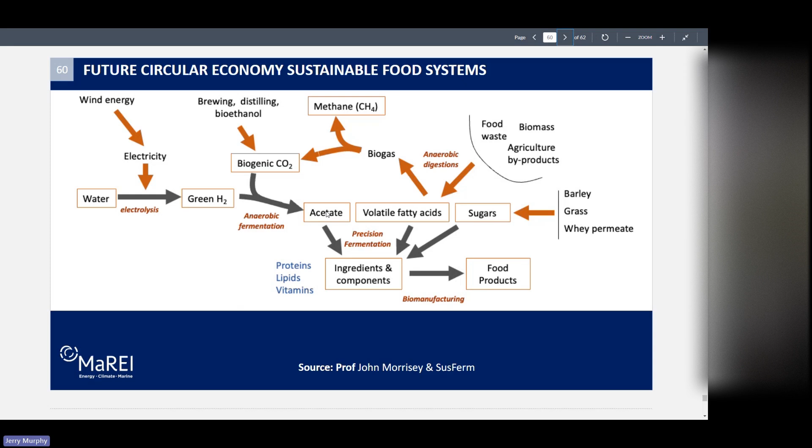So now we have power to food, power to fertilizer, power to chemicals, power to hydrogen. So it's a huge world, it's really, really interesting I think. So this is our system, and there's lots of other things in there that I haven't got into.

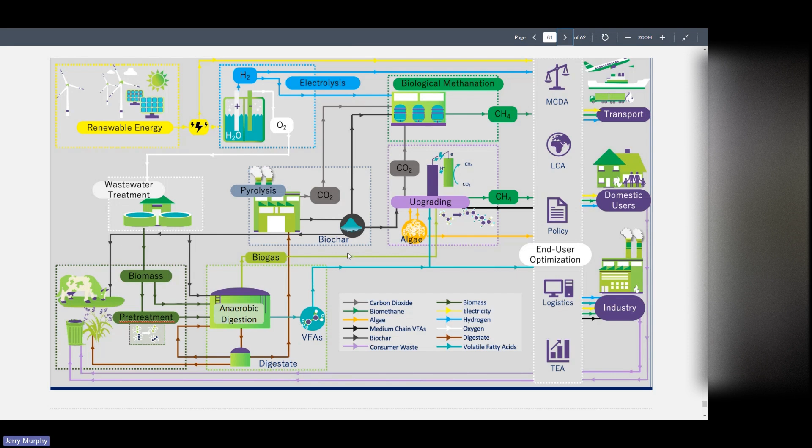Pyrolysis is fabulous - we can make from digestate pure carbon, and that carbon can go back in the soil. It takes 100 years to make 5 mil of soil. So what we're looking at is when we digest something, we can pyrolyze it, make pure carbon, and put it back on the soil and make the soil richer, which increases photosynthesis, which increases yields.

So I would say it's a fabulous world out there. There's loads of things we can do, and it's about how we do them and do we do the right thing. But I would say there's no silver bullets - like offshore wind on its own, or PV on its own, isn't going to solve our problems. We have lots of problem sets to get to net zero.

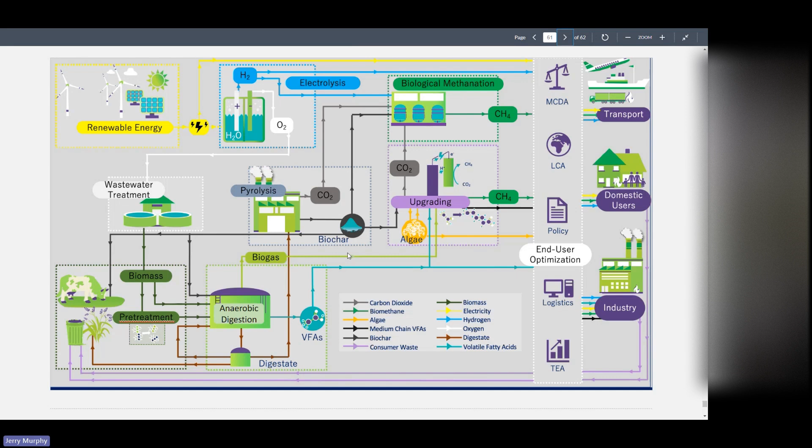So again, I'd just like to thank the team. I think Davis is here, one of my PhD graduates, but this is the work we do over the last 7 or 8 years. And thank you for your time, and I'll take any questions.